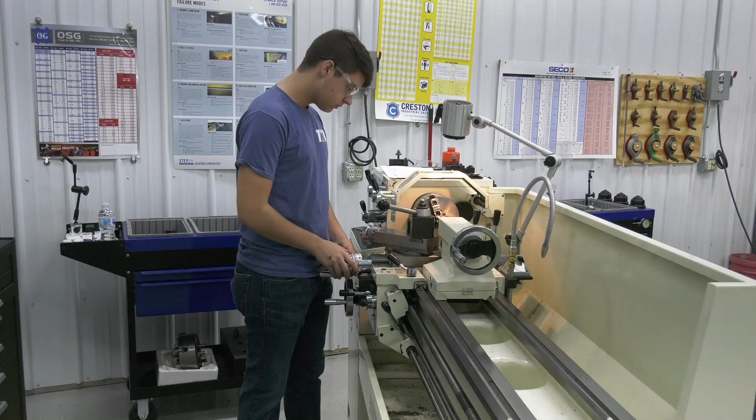How long has the school been operational? Our first year was 2016. So you've been running, this is your 3rd year? Yep, this is our 3rd year in.

How have you enjoyed it? Awesome, it's a learning experience for myself and the students, I guess.

Other than your students and yourself, do you have any other people involved in the school? Helpers that come in to help you? The very first year I had 2 teachers that helped me. Then one had some health issues and couldn't do it, so I took over myself.

So you and the students? Yep, just me and the students. Got to be a good cooperation there.

How long is classes each day? Classes run from 7 till 9:30 every day, 5 days a week.

How many classes do you have in a school year? We have 1 class in the morning right now, and as we build, my goal is to get to 20 students. When we do that, we're going to run a morning class and an afternoon class. And it runs the full school year, from September to May.

Is there any charge for the school? Nope, all the costs are covered either by the state or outside sponsors I have.

Tell me again where the students come from. The first year we had about a 50-50 split between Delton and Hastings. This year we're more Hastings related. Last year we had Barry County Christian, Hastings, and Delton. So we're getting a pretty good mix.

Just needs some more lobbying in the schools to get more kids. You said you have Middleville. Yes. Maple Valley, are they involved yet? Maple Valley is involved, but right now we're trying to get all the kids that are closer to my side of things so they don't have drive time problems.

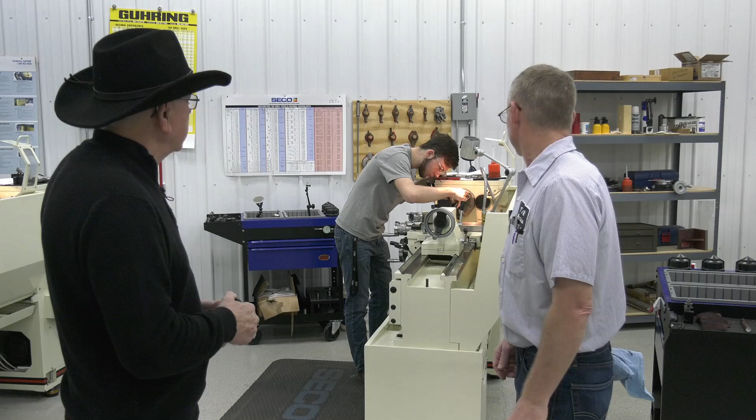What is this young man here doing? He's actually running a manual lathe. He's working on a project to make himself his own tap handle. So they start out right from the beginning, learning to lay things out by hand, to being able to run the lathe and make all their own parts.

All the parts these kids are making are parts that they will take with them when they leave here if they go into the trade. There's a coat rack over there that the students made the first year - the pegs are aluminum, the bar is aluminum, and the students made that. That was their first project for the school.

Tom is pretty proud of the students, I think. Absolutely.

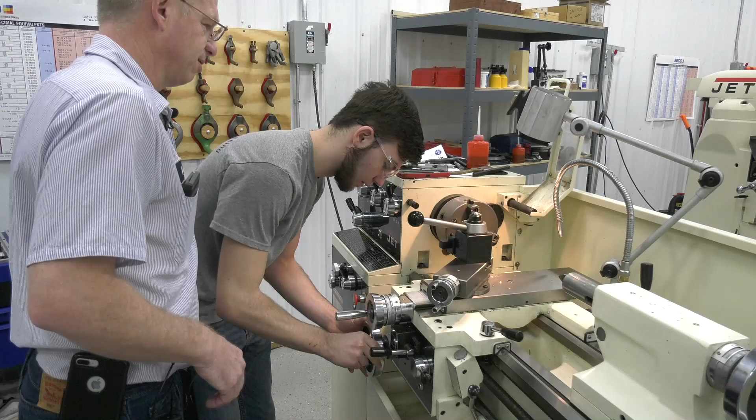Yeah, so now this one here being left-handed threads, go down to your line. So now as you go down, yep. So now we're going to start this time.

You're starting here, and now you're going to feed into it when it's running. And then when you turn this handle on, now it's going this way. Instead of going that way? Yep. Okay, so now when you start it up, with it being left-handed, we're starting here.

So now every time you're going to come back to your 0, now you're feeding into it when it sets there, and then you're watching for that number to come around, and you're going again.

Before you do that, we need to slide that out. Put it out on your center so it doesn't run out so bad for us. We want to slide that out to our center. So that, yeah, we're going to bring this out, we're going to bring this back out so we can slide your part out.

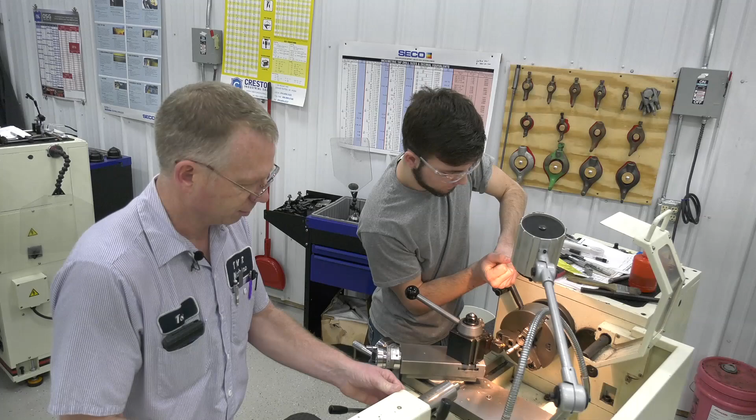So we thread out here by the end. Want this out more then? Yep, you're going to stick it all the way out, just like we did yesterday. So when you get this out, lightly snug it down.

So now when you're here, no, don't tighten it down too much yet. Put our grease in there. So now from there, we'll work on it going the opposite direction.

Coming out. There you go. Good. Yep, there. So now when we go to here, we'll get that close. Now loosen that up. Then you're going to slide this out to your piece now.

There, now tighten it down. There. Now when we set up, now as we set up to run our part, now we're running it from there going this way.

Okay, so now let's go back over and eyeball your line, because you can go to the same number and just set yourself as there. You don't have to go off the end.

Yep, come to your line. Now you can set 0 from there. It's going to be easier than going the other way anyway, because you're going to go to that same spot every single time and come back. So now you can just set your dial down here to 0.

Yep, and touching, close. There you go. And I'll set your bottom dial at 0 so you know where to come back to. Okay.

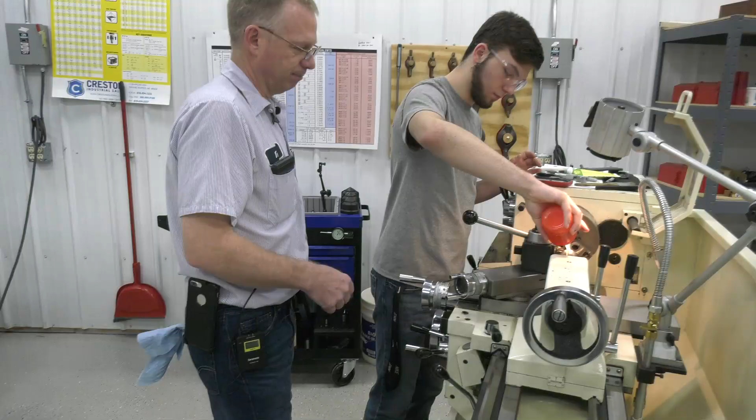Perfect, all right, so now you're going to do just like that. We're starting her up. Okay, now you're going to run in your 5 thou.

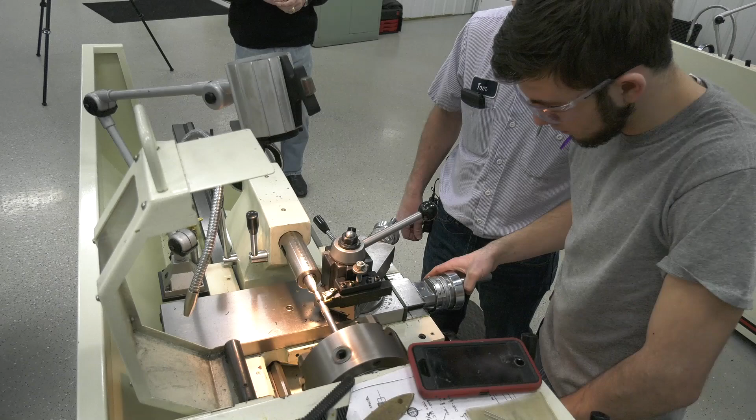Actually go until it touches, actually. Go until you see it make chips. Keep going, keep going. Right there, set that dial back at 0.

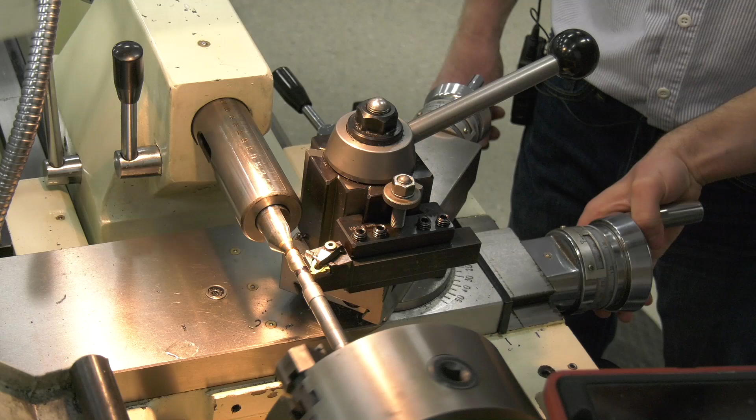Perfect. Yep, so now you got to watch that number come around going the other direction. Now we can get out of line still. Make sure it goes on number 1, yep. Okay.

And now this time we're threading out into the open, so there you go. So now it's threading going the other direction. Now when it comes off the part, now you can stop it, back it out.

There you go, good. Yep, you're backing out like you did yesterday. There you go. Now you're going back down to your 0. Okay, there you go. Now you're going into your 10 thou.

And you're waiting for your next number to come around. There you go. Yep, perfect.

Then once you get up to 30, do 2 at a time? Yep, once you get to 30, you do just like you did yesterday, we'll go 2 at a time. Okay, and now you're not so fast on making sure you hit the shoulder now. Okay.

Yep, make sure you get your number back in. It's a little easier to work than yesterday. Yeah, now you can see the numbers coming from the other way. Make sure you're hitting on a 2.

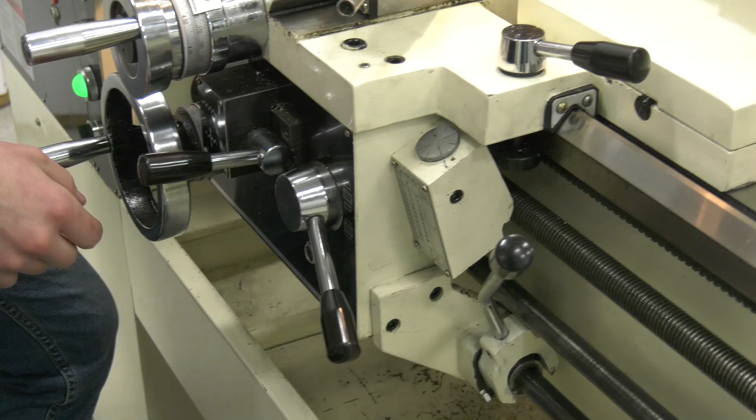Now you're making the opposite hand, so that when you spin the handles the same direction, it tightens things up. Similar to a wood clamp. They had the option of making both of them go the same way, or right hand and left hand. I made them do the left-handed one so they had a little bit out of their element on the second side, expand their learning a little bit. Yes, that got a lot tougher to do, but they learn that it's easy when they're all done.

Some of the projects KCC does are a little different setup than I am, because I'm more one-on-one with everybody. Down there they have projects where they're making a block of steel when they're all done, and it doesn't necessarily mean anything. Well, I made it so everything we build is something they'll be able to take with them and probably use for years and years. Actually, the one we were copying is from one of our tool makers up top. His grandpa made it in 1940.

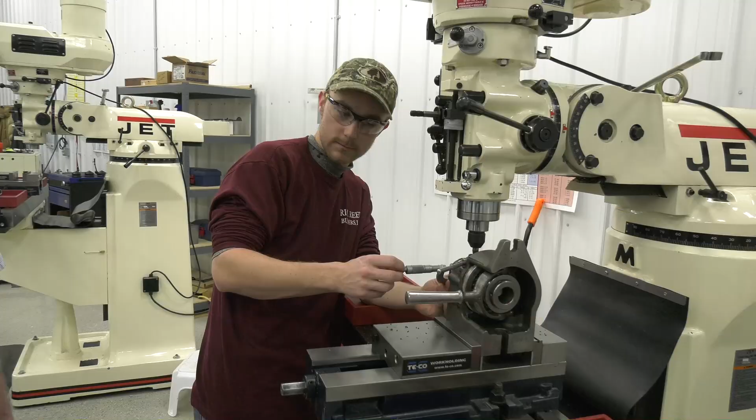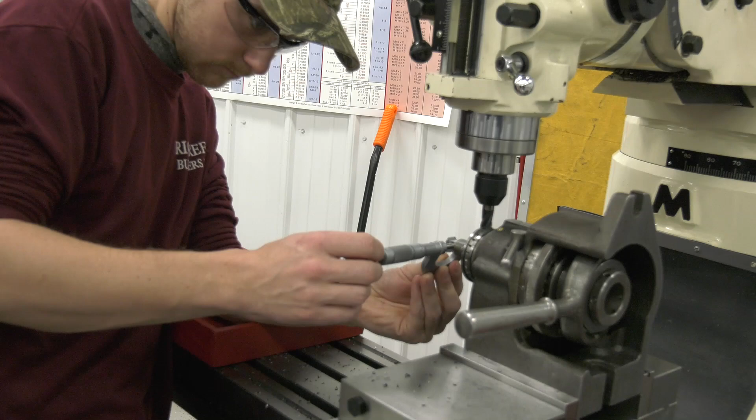So obviously here we're doing a little teaching on this one. Yesterday we taught him how to make a hex on a part for putting a wrench on there, to be able to make a tool we're making. Today he's building a square to put a wrench for our chuck, for our lathe, for our backup one. So he's learning to index the part to get a size that we want. Matt's a first year student. He started in September with no machining knowledge whatsoever, and maybe we'll get a chance to look at some parts that he's made. Being first year, it's impressive, as you start going, what they can actually do in a short amount of time.

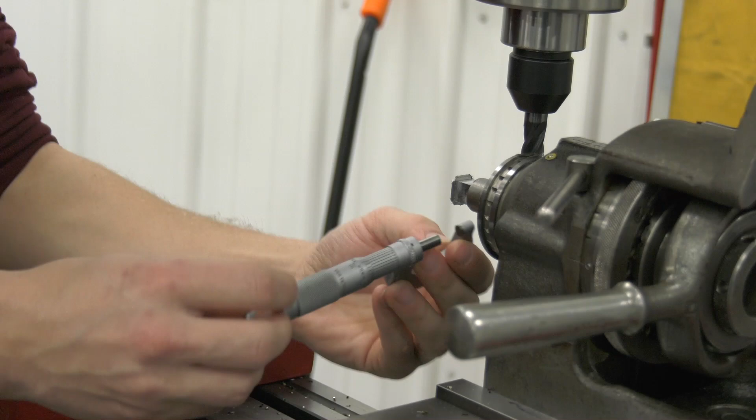Getting close. Technology - using the phone for not social media, but calculating now.

So a little bit more on the thing - the students are running a lathe over there, making the parts over there. They were over here the last 2 weeks building parts to go with the clamp pieces. So we kind of run them in pairs, try to - kind of like a sequence you're going through. They start out with the mill. When they are done with that project, he's going to do the same one. Then we'll rotate from him being on the mill to them guys being on the mill and finishing up their part of the project.

It's definitely rewarding to see the results they get - from nothing to, 5 months in, they can do a lot more than you thought they could.

Where do your machines come from, Tom? Actually, all of our machines we purchased through Alro Steel. They actually gave us a pretty good discount buying all of our machinery through them.

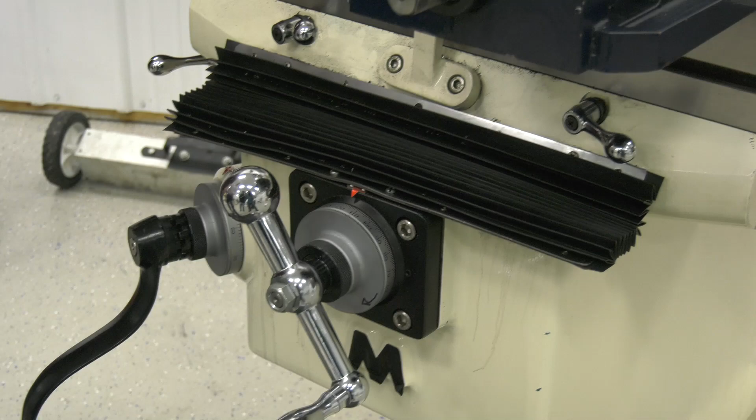How much you got to go? 60, so probably 30. How much? About 60 thou. So only 30 - yep, you gotta take 30 off there. And then you have to come out the end too and get the end when you fall off at the end.

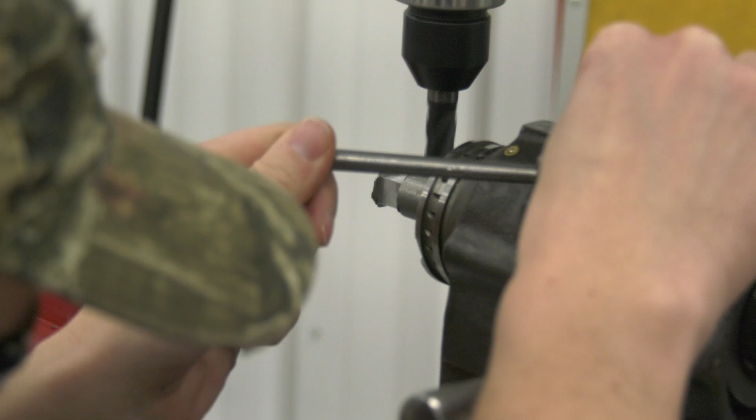Yeah, this part of the project is teaching them how to index, trying to get to know how to make the part square or hex or whatever we're trying to make that day.

Once you're all done with that right there, then just slide out to the end and go across there and pick the end of that off.

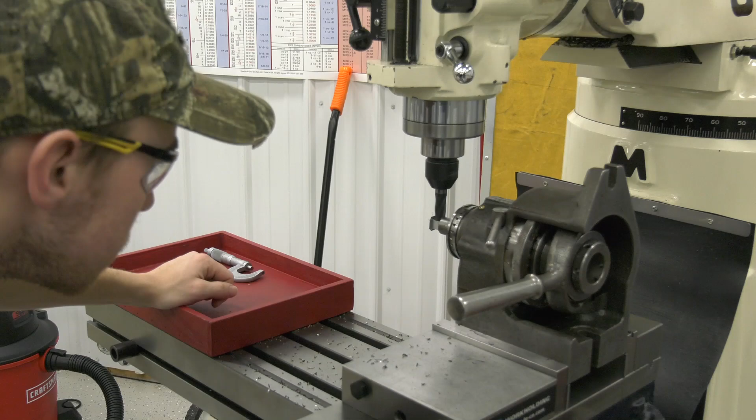That had been last week. We did some work for the Hastings robotic class for their robot. They were missing some axle shafts, so they sent the parts out for us to duplicate. On the robotic program, they've got a budget they have to stay within. So if they farm parts out, they have to add that cost into the robotic program, so they only get to spend so much. But if we use the Hastings students to build their parts, it's free to them. So now with the shop down here, they can send them down and have the students build the parts, and then it makes their budget that much easier to work with. It helps their budget, plus it helps kids.

Make sure this one here's clamped too. Okay, back her up a ways. Keep going, keep going, keep going. You can move right out there. There you go, that'll get the end off there that way. Just snug your table back down.

Careful, don't put your hand in there while it's running.

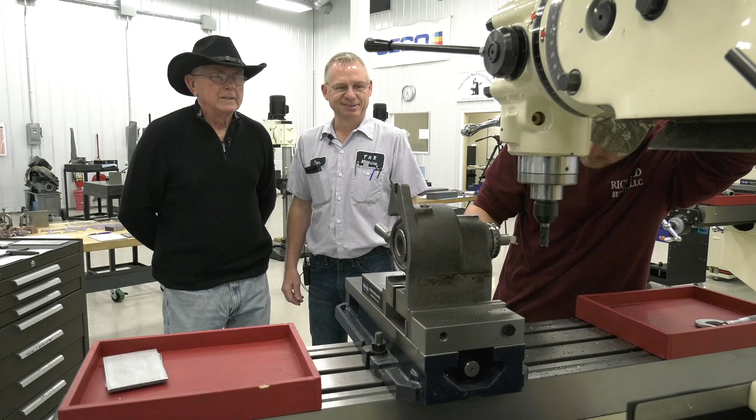The other thing that's kind of challenging sometimes is getting the kids to understand the safety side of things. Obviously at that age, you are a lot more fearless. But they learn. You try to educate them the best you can.

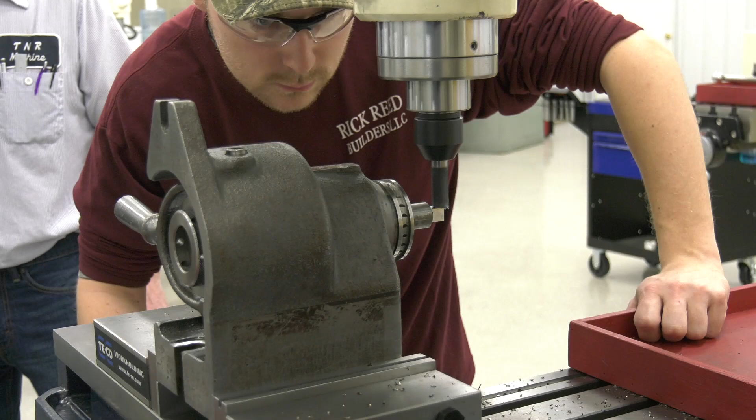Well, you're doing a good job, Tom, I'll tell you that. It's definitely satisfying when you see where kids come from and where they go to, and by the end of the school year, the amount of things that they can do are really impressive. I can imagine it's very satisfying.

Two out of the three students that are down here today have never run a machine before they ever got in here. So to see them making parts through the school year is really impressive. Oh, I bet.

How big do you have to be when we're done? 386. There you go, right down the money that way. How's the other way? I'll check another way.

Yeah, your mic's not square. There you go. Nice, very nice. Now I'll take that one out and then we'll file all the corners, make sure all these edges aren't sharp.

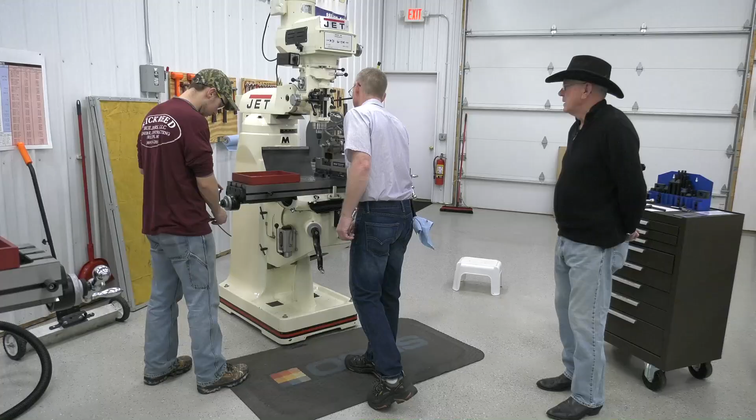You gotta go back and get the shoulder yet too? Wasn't in the back all the way. Oh, so you got to make the finish pass now? How much we got to go to? Right there, half-inch back? Careful going across there. That'll be our last pass to hold our shoulder. Good.

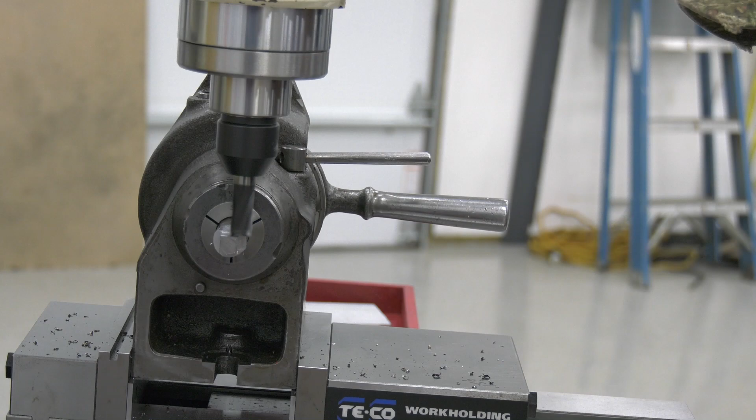We even did a few projects last year that were farm projects. Had a couple local farmers bring some parts in, and they donated money back to the program rather than payment. That helps everybody. They bought the steel, they bought all the stuff, and then labor, and then they donated money back in for us. We actually got to buy some new tooling from that last year.

Yeah, the kids got to see what it is to work on farm equipment when it's already in rough shape.

So that should put us on the final pass then? Sure. Got all four?

We're now in the main part of TNR Machine. This is the production area. Tom has 40, we have 42 people right now, actually, 42 people that are employed here. We have CNC, most of these are CNC machines up here. We only have actually 2 manual machines up here, so everything's automated up here. We're going to show some of the operation, watch a couple of things that the employees are doing, and Tom can explain them as we go and tell what the people are doing.

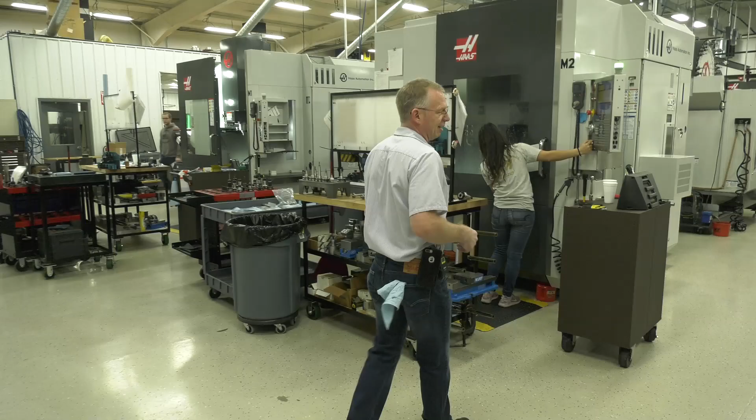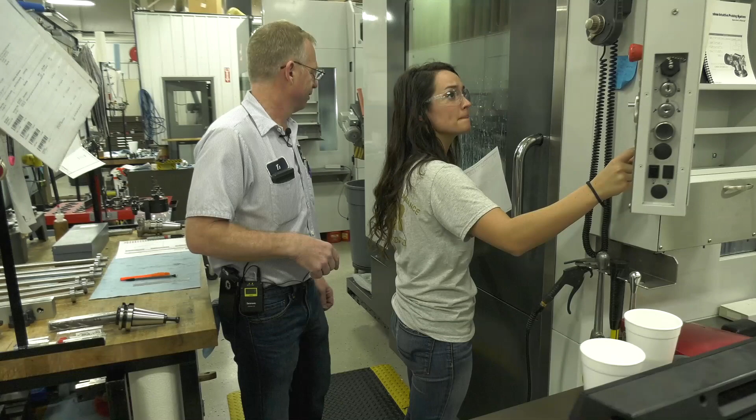First, we'll work on everything there. We have Sarah here, she's actually running one of our 5-axis machines, which is new to us the last few years, trying to get in the world of technology. She's building some parts that are for Denso Manufacturing, which is one of our biggest customers.

Here, what this allows us to do is do a lot more sides without having to reset up every time. So just making it easier for us to do harder projects easier. Work smarter, not harder. Yeah, absolutely.

Yep. So this is one of our latest machines we bought as far as technology, trying to get us up into the upper part of the new technology in here.

She's new to the 5-axis. She's like in her 3rd week, so she's taking on a different challenge in the machining world. Good for her. How do you like it? I like it a lot. It's a lot more challenging, but a lot rewarding too.

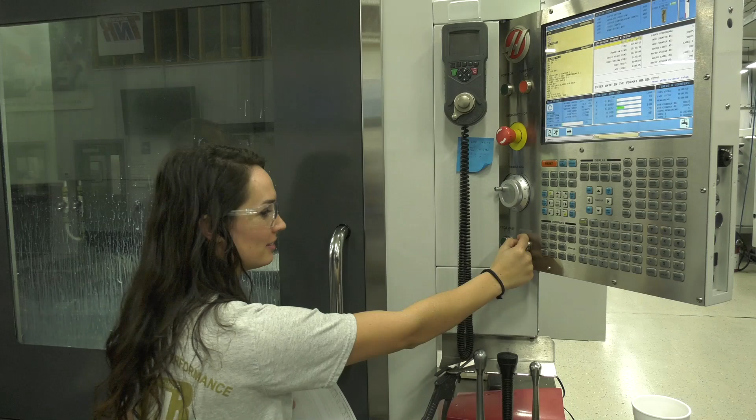Obviously we have to go do our CNC part of the department.

Going into this area now, this is more on our higher end finishing part of things. This is our wire EDM department. Pretty much everything we do that is tied to the die and mold industry ends up coming through this part. The wire side of things is a lot more precision and a lot more delicate pieces we put through here.

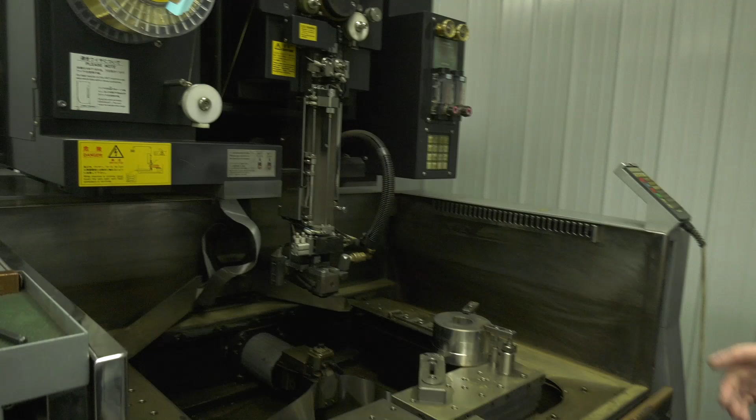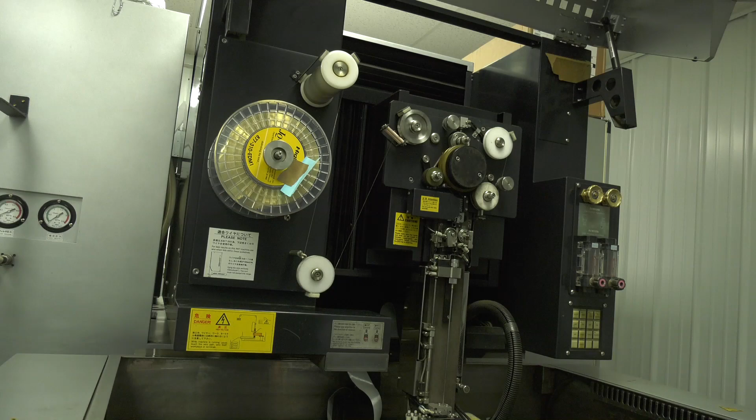Our latest machine is a little bigger, made a bigger envelope in it so we can run more parts without having to be manned, so we get more unattended burning. The advantage of this right here is the amount of accuracy you can run on delicate parts. This one here runs at least 20 hours a day on average of overnight burning. So it allows us to get hands-free.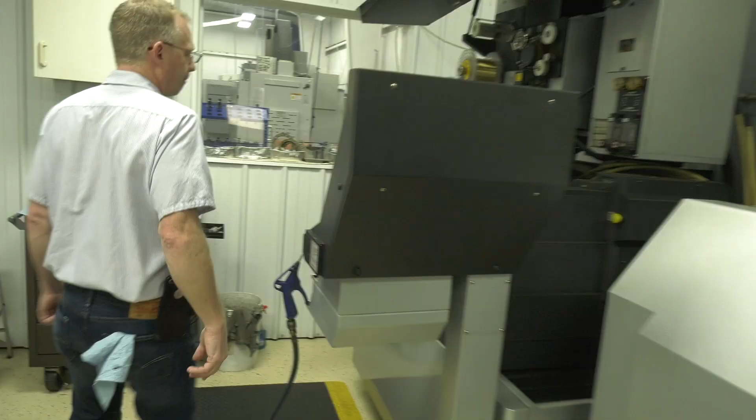How does that machine work, Tom? Well, this one here, the part is grounded. The upper head has a brass, 10 thousandths diameter wire, and all it does is has a controlled arc, and it burns the material away. This one here, you can actually see the actual arc down inside of there where it's actually burning material.

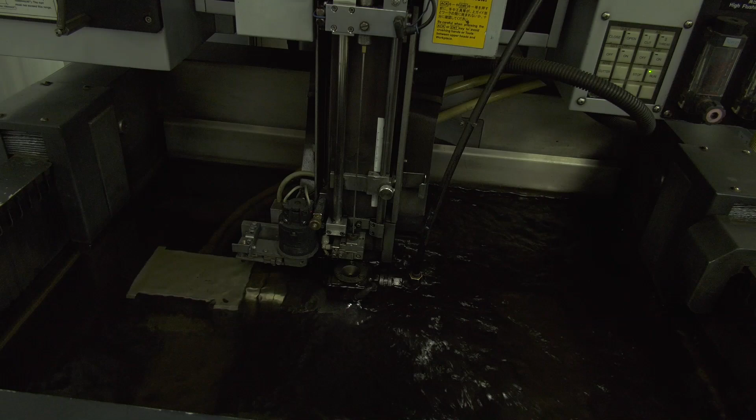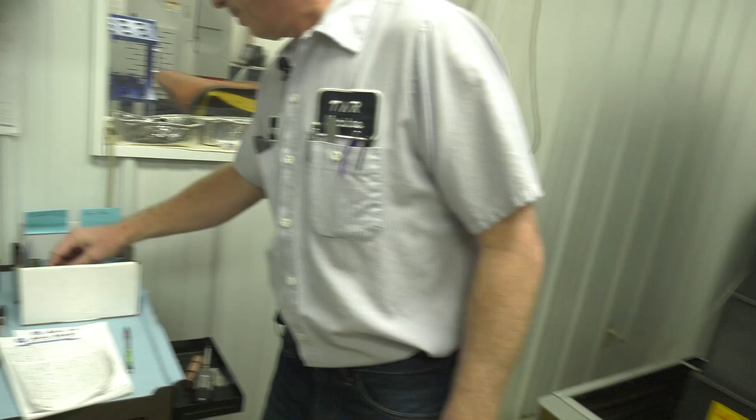What we do on this one here, right now we got a project that we developed and helped troubleshoot for Denso. It's called a flying cutter. There's a pair of these cutters, they run together. It cuts off a 39-inch tube, one every 2 seconds, with it not moving, it never stops. The material's always moving, and it keeps cutting as it moves. So this is actually sliding back and forth and cutting it off. We spent 2 years trying to help them develop it so that it can run faster, so now they can do twice as many parts in the same amount of time.

I've been around this for most of my life and it's still interesting. Yes, it is. The amount of change is amazing. Oh yeah, always a new challenge. Every day. Yep, every day.

The downside of this one here is with our development of changing how they did the part, it cost us about $100,000 a year in revenue, being the fact that they use half as many parts now, but we generated more income on a different part of their business, so in the long run it helped us out.

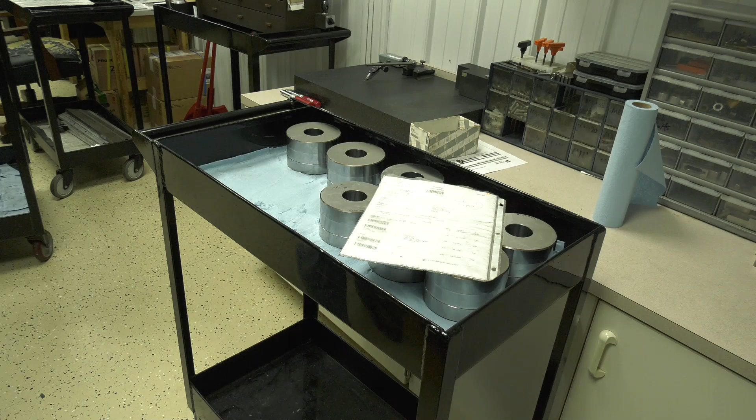Now what are these, Tom? Those are what they call fin forming rolls. They make the tubes that go in your radiator that the water flows through. There's, I think, 25 rollers in every machine. It starts out with a flat piece of stock, and by the time it's done, it folds all the way around and turns it into an oval tube. Roll former. Yep.

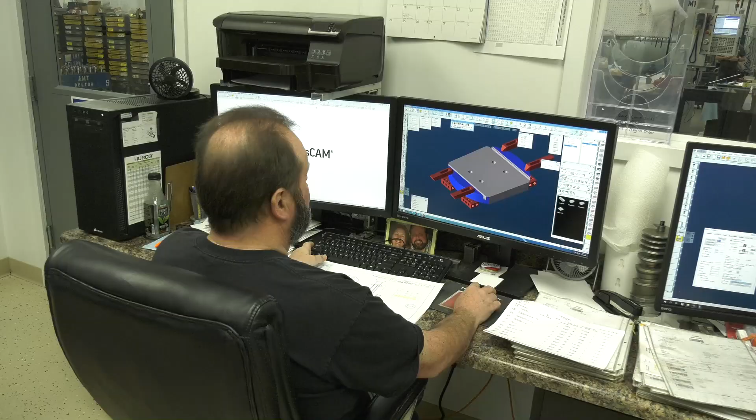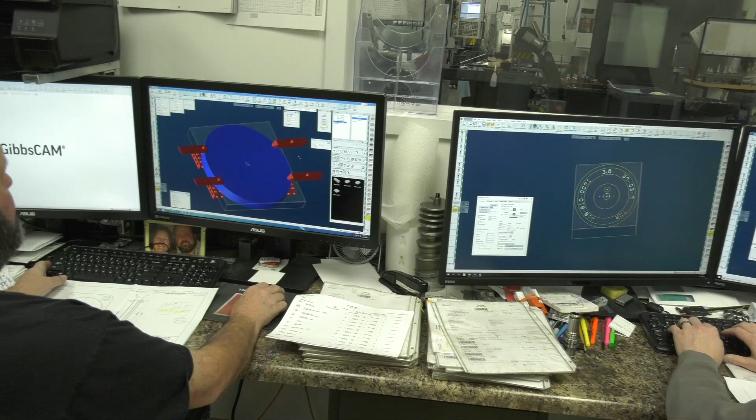Here is where all of our stuff actually starts, in our CAD CAM side of things. As you can see here, we program everything offline, and then from there it goes out to the machines. In here we can do simulated stuff, so we know what everything's going to look like before we machine it, where things are. So everything that we do in here, we try to do up front, so that when we get on the shop floor, our machinists have an idea where everything's at, allowing them to be a little more efficient on the floor, rather than a lot of shops that still program and do all their stuff on the floor. We try to do offline so we can have more uptime for our machinery.

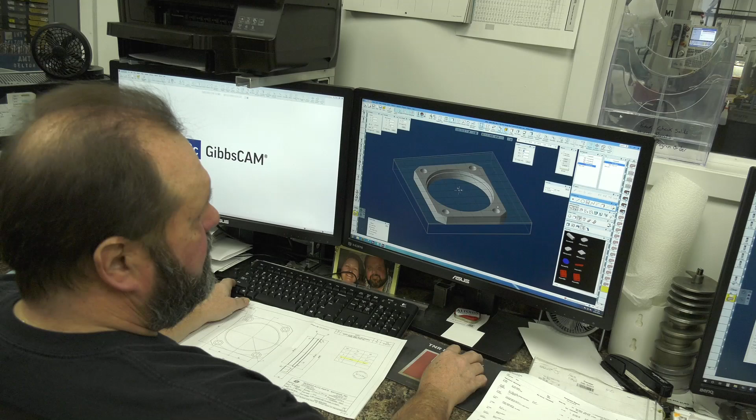Makes it more efficient for the operator, that's for sure. Yes, a lot of the work's already done by the time it gets to them. Yep, it puts a little more responsibility on the programmer, but allows us to have more spindle time. But if they make a mistake here, they can correct it without ruining a machine too. Yep, the software has gotten better to where you can detect a lot more stuff in here.

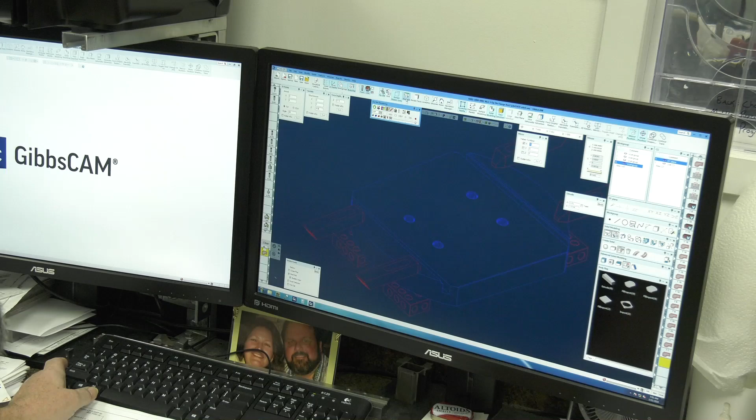That's a continuous process for us, looking for new people to come in and help program. We tend to be always short-staffed here. Do you have a hard time finding people? Yes, we do. Yeah, everybody does.

That's obviously the biggest challenge in trying to get the school up and going and getting skilled kids to come up here. We've had three kids from down below make it up to here, and all of the kids who made it through have gotten jobs in the industry. So we're 100% on getting kids into the system, but we just need more.

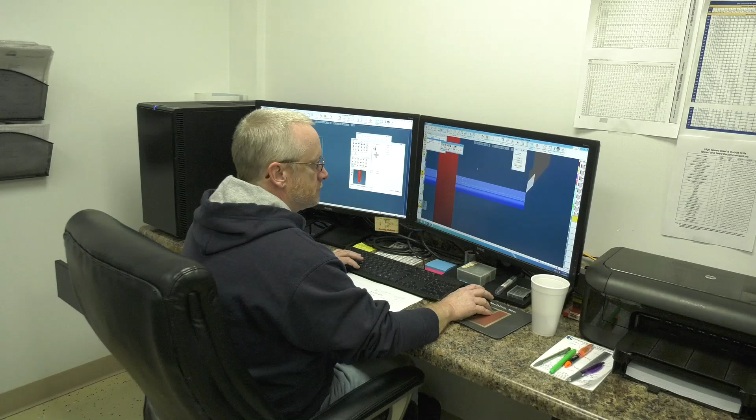I congratulate you. Most of this stuff here is on the mill side, and we do the exact same thing on our lathe side as we do on the mill. We have our programmer having things done prior to making it to the shop floor.

The advancement in technology on the CAM side has been huge for us. It allows us to be a lot more competitive and learn new things. As we go around, our new machine out there has live tooling, which has mill and lathe on the same machine. So that's a new challenge for our programmers here too.

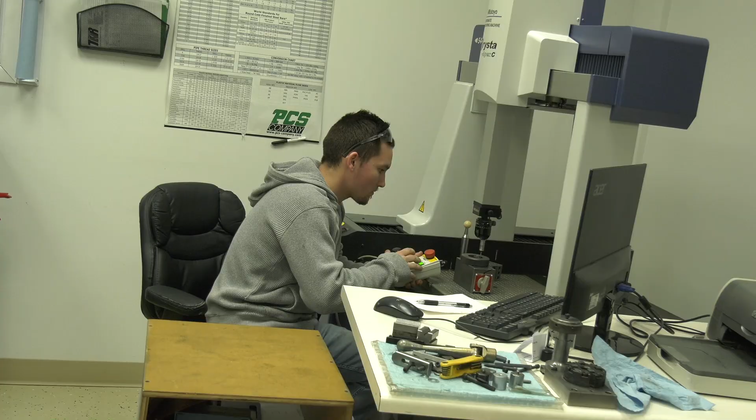Also on our inspection side, everything we do comes through here at the end before it goes out the door, so everything has been inspected, and we know our customer is getting the quality part they deserve.

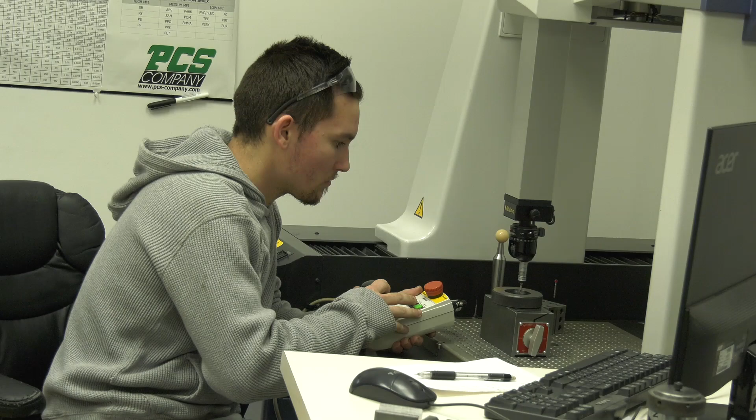I'm Bill. I don't know if you've met Ron, which is my brother and our partner. He's been in it since the beginning with us. So it's him, myself, and my dad in the business together.

On our new inspection department, when we moved to our new building in 2013, we had 18 people, and now we have 42 people. So we've put on a chunk of people since we moved to the new building. We upgraded people, well, it shows.

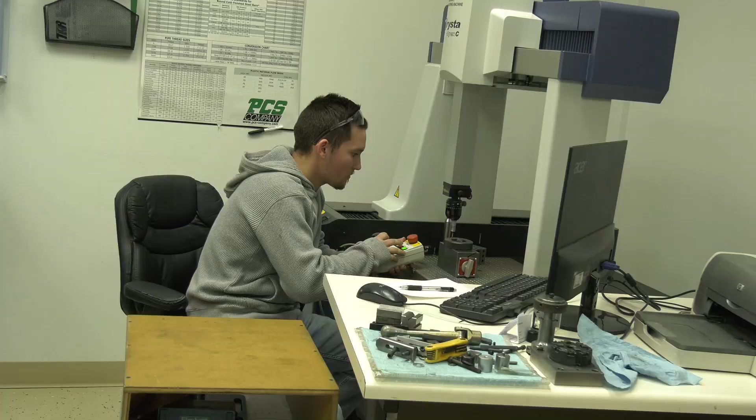We've invested a lot of time and effort in trying to get technology up, and on top of that, I think we have 16 of our employees under the 28-year age group, which is both a hindrance and a good thing. So we've got a pretty young group going through, and that's all going to make it better in the years to come.

The amount of guys in their late 50s, early 60s wanting to retire, there's not much behind them, so hopefully we can jump on that train and stay ahead of the game. But it is a slow process getting the younger generation trained to be skilled enough to do the work we want them to do.

You put a lot of time and money into the future, and you're to be commended, both of you, for that. Thank you. Yeah, the future is definitely the younger generation's got to cover us.

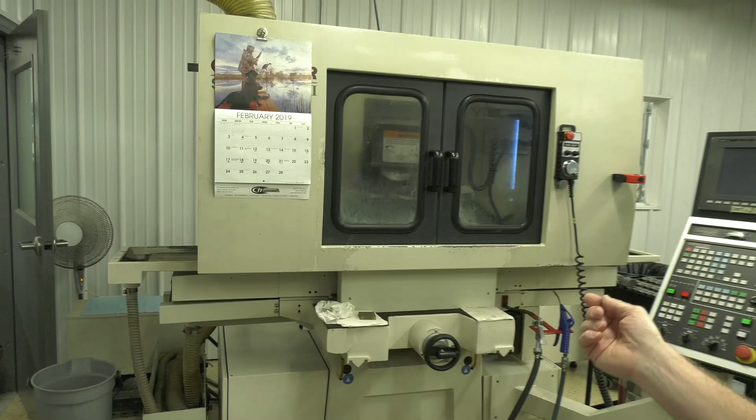When we're running into our grinding department, which we've tried to keep up with technology, we've invested in a CNC surface grinder to be competitive on the automated side of the world.

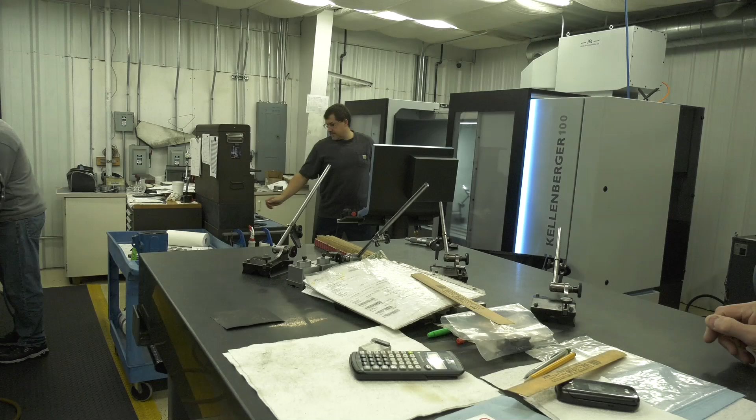Our next purchase is our new OD grinder. It's only one of three in the country, and we have the only one of this model, so it's a $500,000 investment into a machine that's the only one in the country right now. The technology is new, with capabilities to grind round parts as well as parts that have a cam on them, and it can also grind threads. The controller on it is the first generation out.

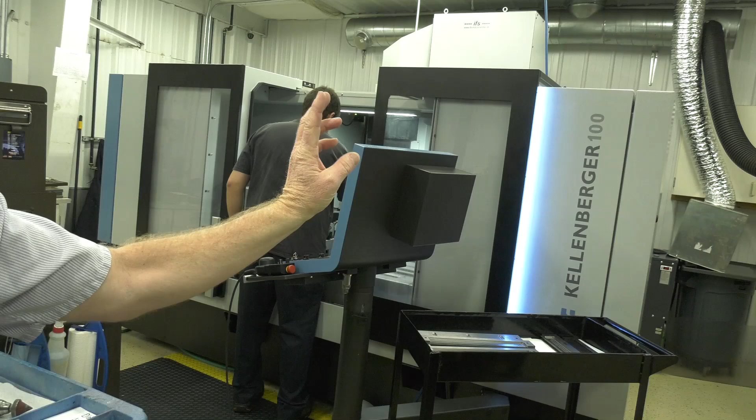It even comes with LED lights telling you when it's not running, green when it's running, red when it's got an alarm or has stopped for a problem. The advantage this machine has for us is it has 3 wheels: 2 OD wheels, an ID wheel, and a probe to touch off the parts, so we can do all the setups in one shop.

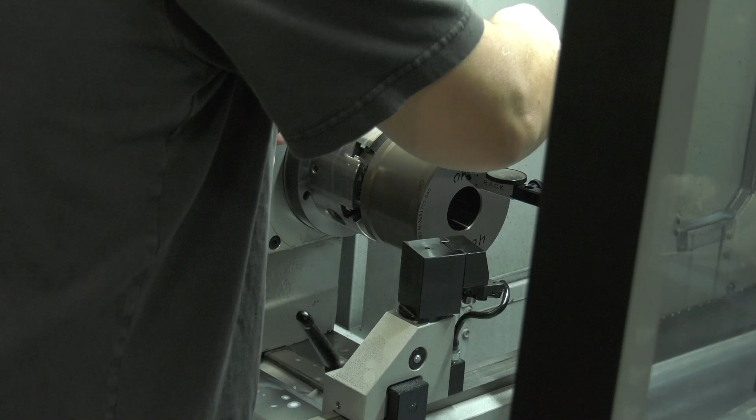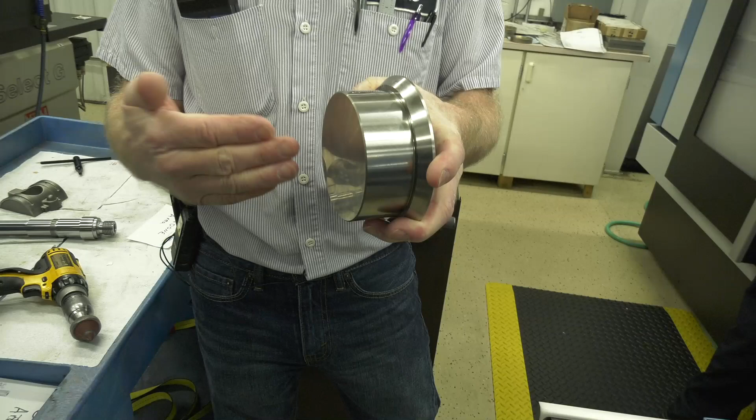So we can do a part like this right here. The grinding wheel can bump here, it can grind here, and then the head can actually turn and come over here and grind on an angle. So we can now do all those without ever having to let go of the part. Before, over here, we had to stop it, we had to turn the part, we had to do all kinds of things to get the angle. For this one now, it doesn't have to do that.

Now, is he making this part here? Nope, he's making a similar part to the rollers we have in there. Oh, okay. Oh, sorry, Rich.

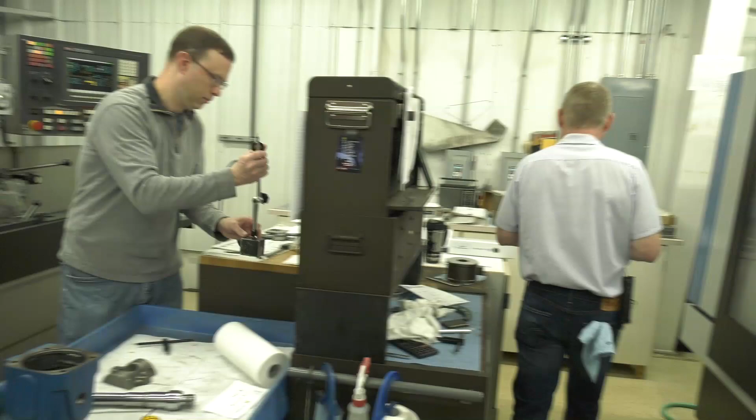So the biggest advantage we have of this one here is we can actually grind the inside and the outside, all without ever letting go of the part now, because the ID wheel is tied right to it.

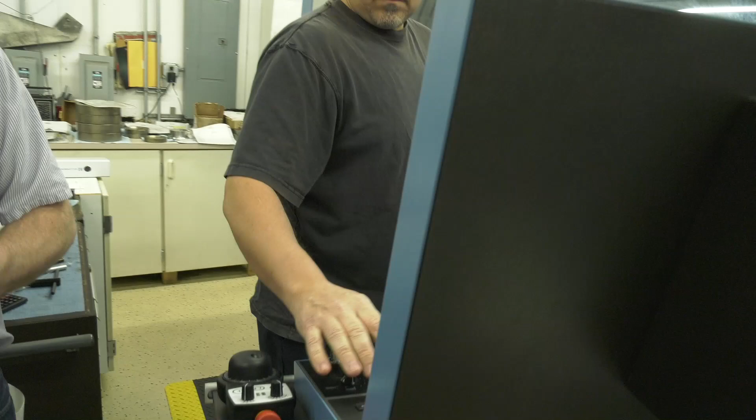Can you back that up and spin that head around, please? Which now allows us to be able to bring whatever head we want around there, whether we're grinding straight or grinding angled.

So we pick what we want to do. We can pick the wheel we want, spin around to the one we want.

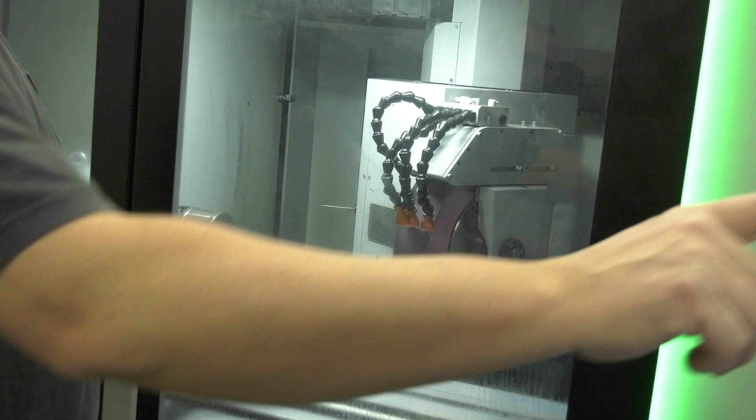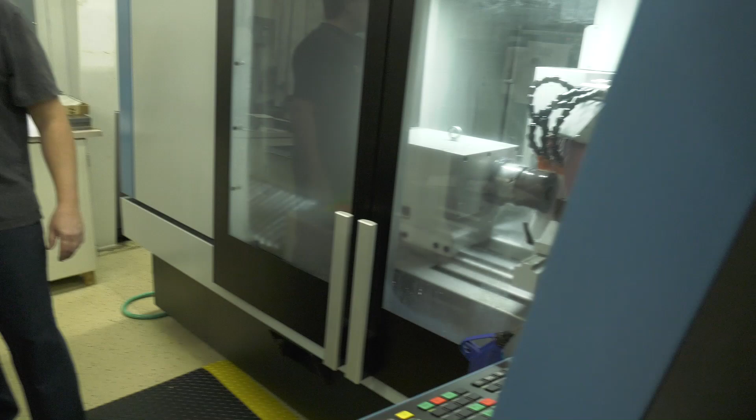Yeah, the LED lights on the end were an option too, and they threw it in as a thing when we bought the new machine. We bought it at the tool show, and being that we bought it at the show, they threw the LED lights and some other features on it.

They had one at the tool show that showed up 2 days before the show, and that was the only one they had. And then we end up getting this one here right before Christmas. So it took them 2 months to get this one.

Is this last Christmas? Yeah, just. So it's only been here a couple, 3 weeks. Yep, it's been here. Right, we actually installed the first week of January. So this is not quite 2 months.

So yeah, the controller's new. What they did is the Hardinge Group, they own 4 different grinder places. They took all the things that everybody liked and put them all on one machine.

So where was the machine made at? Germany? Switzerland. Switzerland. Yep. Swiss made.

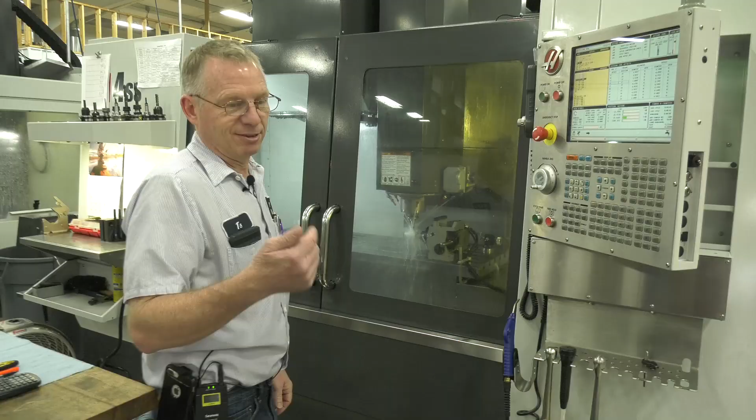Like a watch. Yep. This one here is actually running some more parts to make the fins for the automotive industry, for the fins for your radiator. This makes the fin. This separates them out.

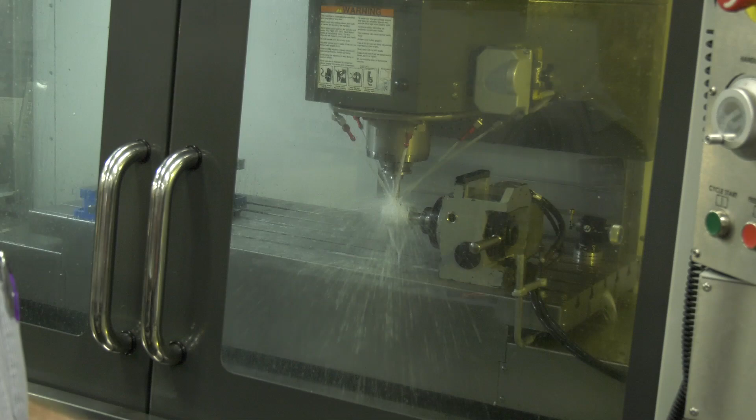This one also has, as you can see, the coolant in here is clear, brand new. The coolant's brand new, that's come out. It's been out about 6 months. It's a full synthetic, so you can put your hands in it. You can put all the stuff in there. No problems with any of that stuff. And it's clear the whole time.

So the advantage, as you can see, some of the other machines, it's oil-based. This is not oil-based. What's going on in it? Yep, this one's all synthetic.

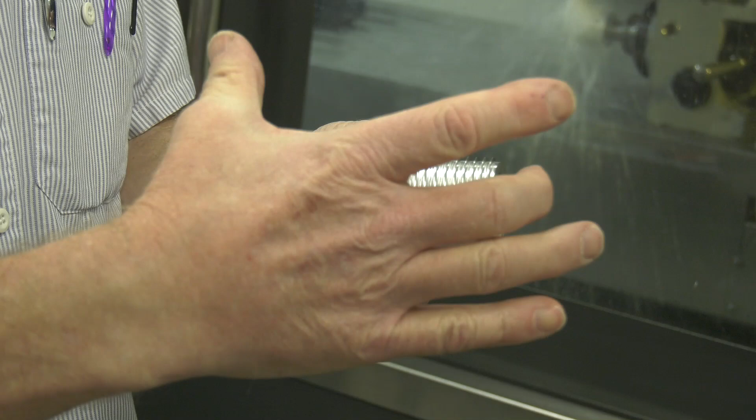This one here is making the part which spaces the fins out, so that other cutter I showed you earlier can cut the parts off. So what it does is it spaces them out like an accordion. It spaces them out, cuts them the right length, and then when it comes back, so that when they assemble it, it's the right length.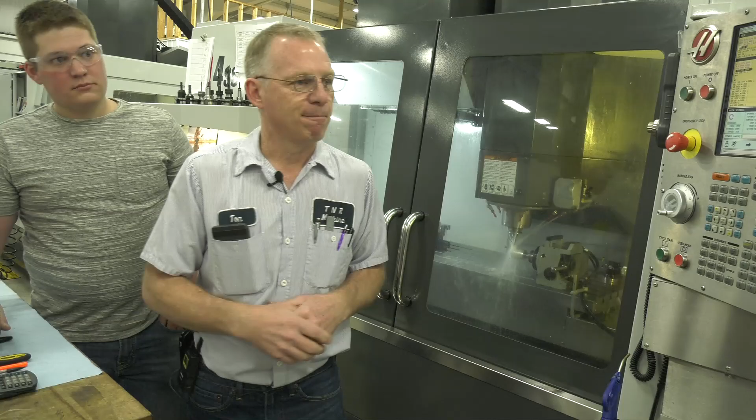Yep, so this one here we're using every day. We have to use the 4th axis on this side, where the first machine was our 5 axis. So this one here we can use our 4th axis, so it's actually spinning the part and moving at the same time.

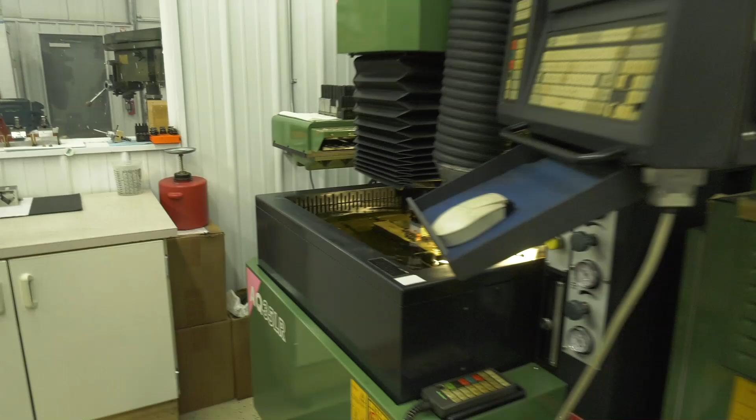Yeah, on this side of it here is our EDM side. This one here actually makes the end tubes that are on the end of the condenser unit. This is actually the punch that punches the end of those on there. So when they assemble them to solder the tubes on, this makes the end caps. So it's got a top profile on them, that's the shape of your condenser.

Nothing. Like I said, I've been around this stuff all my life, and it still blows my mind. The amount of things you can do today is really impressive. The sinkers still haven't quite made it up to the speed of everything else in the world, but the things you can do with it are still a necessity to us.

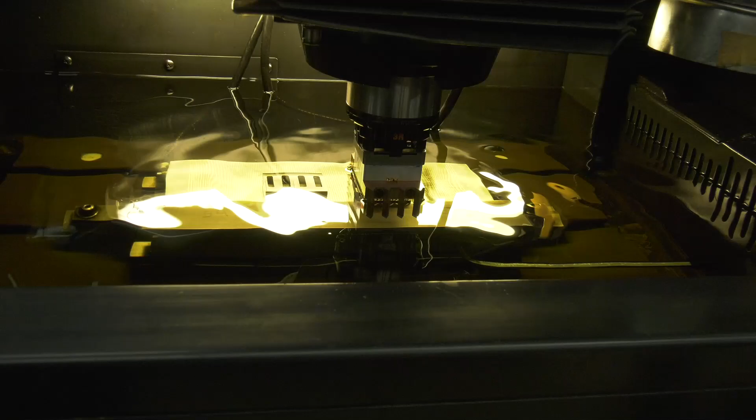There's some areas you just can't wire. Like that part right there has such a small corner in it that you can't wire it or anything. It's got a 4/1000 undercut in it. So where you're seeing it sinking, it's sinking this corner out here, which is a 4/1000 corner, and it's actually backdrafted, so you can't come straight through. It's diagonal to the middle, so when they punch it out, it leaves a sharp edge there, and they don't have to re-deburr the part. That corner is so small and it's blind, you can't go through because it has a piece in the middle, so you end up having to sink it.

How many of these do you make a year? We do about 100 of those a year, depending on how much they crash. If they crash, they use 20 at a time, but usually about 100 a year. They last about 30 million hits each one.

So yeah, the necessity for the sinker is big on this one. What kind of steel is that? M2. Yep.

Is all of this done on that machine? Between this machine and wire machines. The wire machine does all the top contour, then this does all the side contour in the back.

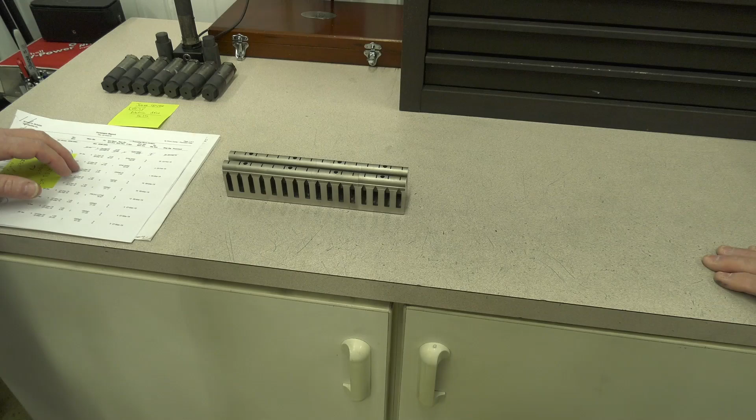Incredible. Yep. So every one of the condenser units, this is cutting the end cap, and they actually stack when they run them. They're stacked down through the die like that, right there. There's 20 of them in a row, and it's actually working its way down it.

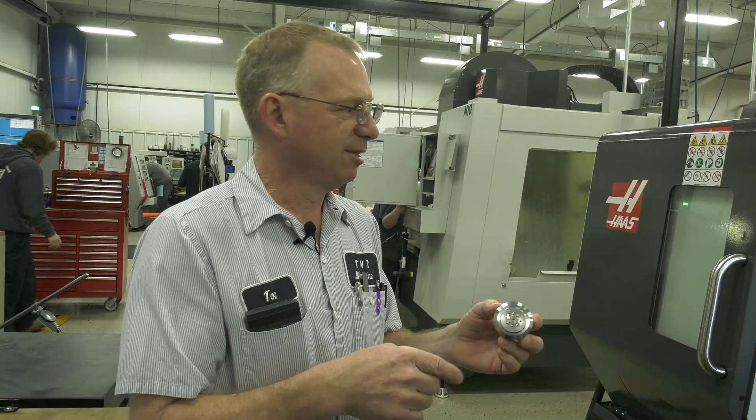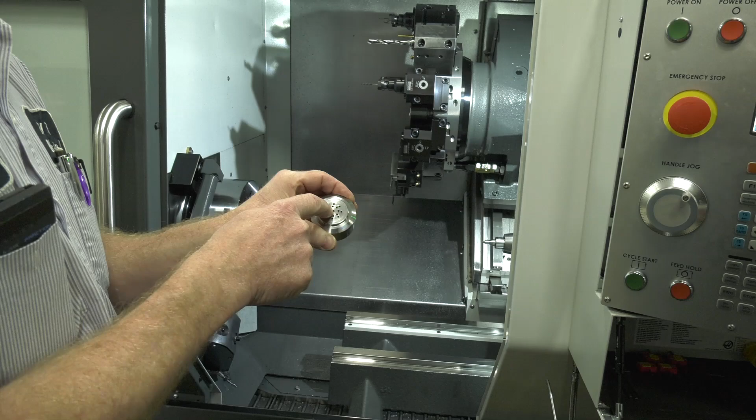So this one here is upgraded to newer technology also. It's laid out with live tooling in it. So what we do now, where in the past you had to turn the part, and then from there you'd have to put it in the mill to put all the holes in, this has all those tools in there. So now we can actually turn the part, drill all the holes, and then just cut the part off, so the part's done coming off one machine.

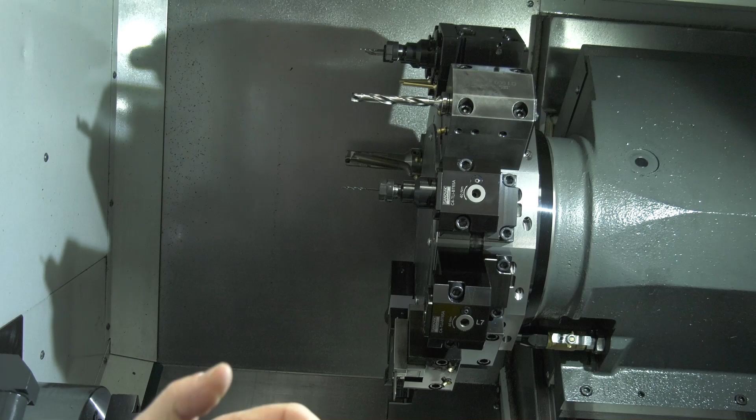Multi-head. What's that? Multi-head, yep. So we've got live tooling, and it can either drill holes going sideways, it can end mill, and also drill on the edge of the part too. We can have tools coming out this way also. So it allows us, instead of having to take it off one machine and put it on another machine to put the holes in, we can completely run the part on here, and when it's done, the part's done.

So this one allows us to do multiple features on it without ever having to let go of it. Time saver, yep. So this is our newest investment. We try to always keep up with what technology is doing, to allow you to free up some time and effort in this.

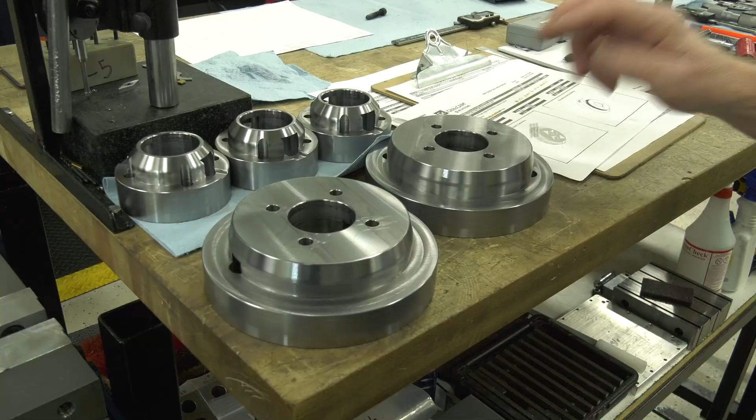These parts here now, which is kind of interesting, these are for Dicastal in Greenville, Michigan. They build aluminum rims at 10,000 a day. So we do a lot of the tooling for holding onto their part, and we do a lot of gauging for gauging all the truck rims and all the stuff for the bolt patterns. We do a lot of that.

This customer came from, he used to work at Musashi Auto Parts in Battle Creek and lived in Rockford and didn't want to drive anymore, so he went to Greenville. When he went to Greenville, he took us with him. So it's the customer relations, keeping somebody happy as a customer. When he moved, the work went with him. So that's the other way it happened, yep. And all of our business is all word of mouth.

We don't have a salesman or anything. I did one sales call the first week I went into business back in 1991, full time. Never had another salesperson ever since.

By the looks of things, you don't need one. We struggle to keep up as it is. So that's where the school and the younger generation are going to come back to help us in the end. Our local businesses should be able to profit highly from the new skilled labor. Yep, everybody's going to profit. So this one here, you're still back at the old school side of things.

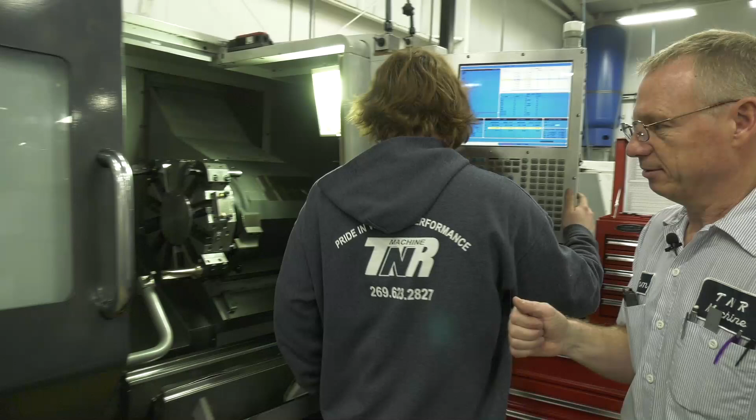Just the old-fashioned lathe. So we go from this to the new live tooling one, it adds another dimension.

Talking about the younger generation here, we're in the 20-year range. He's been just over a year learning to run machines. He started out doing odds and ends for us and worked his way into machining. Well, that's where our future's at.

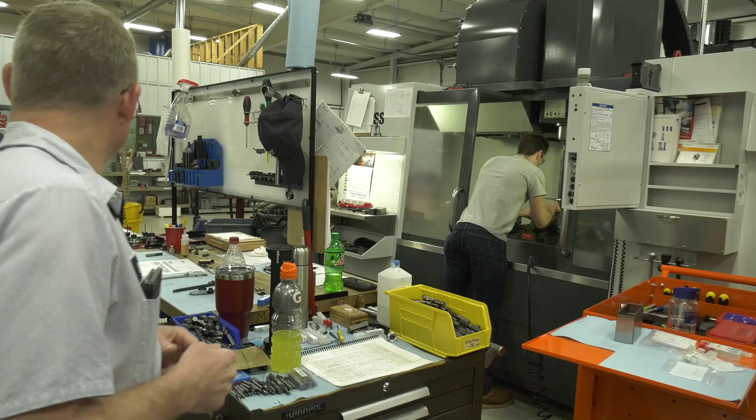Yep, so that's where the future's at. Here we're into our milling department. On one side we have a younger, newer employee doing some hard machining on some forming dies for Denso. Then on this side over here we're doing our fixturing stuff for Denso, trying to teach them the new ways of doing things.

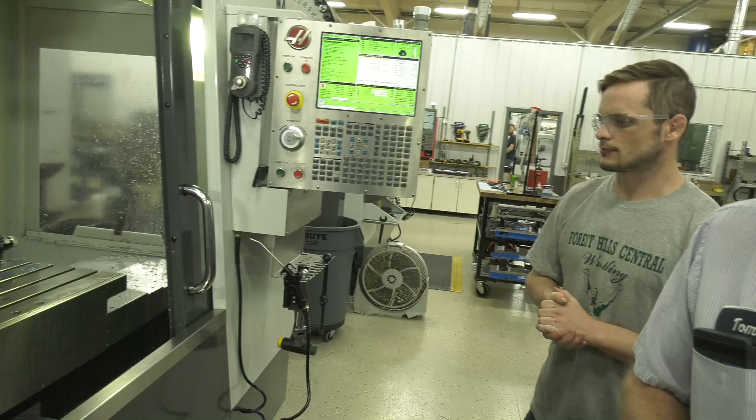Part of being on this, our next generation - this is my youngest son, and they're teaching him on the machining side of things, trying to keep the family side of things going. Teaching him how to machine has been an interesting couple of years, but he's done really, really well.

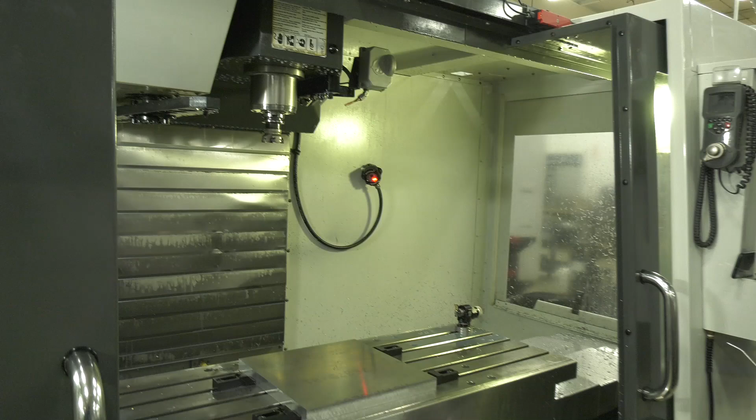Good, this is the end of our tour. We want to thank you very much for this, and we hope the listening audience will get something out of this also. What inspired you to start something like the school?

Well, with a shortage of people we had up here, we're lacking skilled labor. Going back to when I was in high school, somebody gave me the opportunity to get a career that I've had for 35 years, and it's done well. I figured it was only fitting to give back to the younger generation and give them an opportunity like I had. So the goal was to allow students to have an opportunity. Being that Hastings High School and Delton took away their machine shops, I figured I would help that situation out and give back.

How long have you had the school going? It's been going full-time since 2016. And your goal is to get 20 students per year to push into the industry.

So you're going to have a full-time job just down there teaching students. Yes, yep. Actually, I've had some people interested in teaching once we get up to full-time. As long as we're teaching the curriculum at KCC, part of the agreement we got with them is that they will pay for the teacher once we get to that position.

Well, I appreciate what you're doing, I hope everybody else does too. Great, I appreciate you much, sir. Yep, thank you. Do you have anything to add?